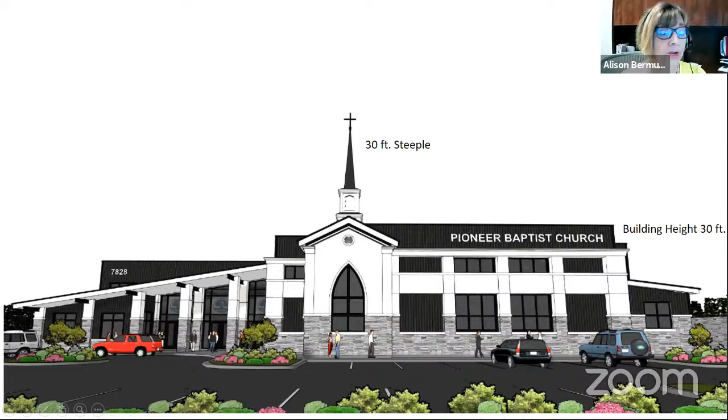The proposed church will be a stucco building with some metal siding, tinted windows, and stone - a very attractive church facing Auburn Boulevard. The building will be about 30 feet high, well within code allowance. A unique feature will be a large steeple, approximately 30 feet, giving quite a presence on Auburn Boulevard. Due to the distance back from the street, this larger building with the increased steeple will really help with that presence.

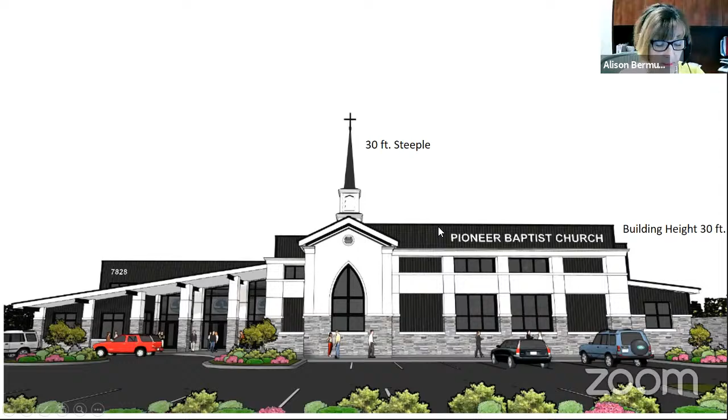The building includes a drive-up turnaround circle for people to be dropped off. The architecture extends along the front of the building around to this main drop-off area, as you can see here. There are additional windows to provide lots of light inside, some arched windows, along with the metal siding to give some accent features.

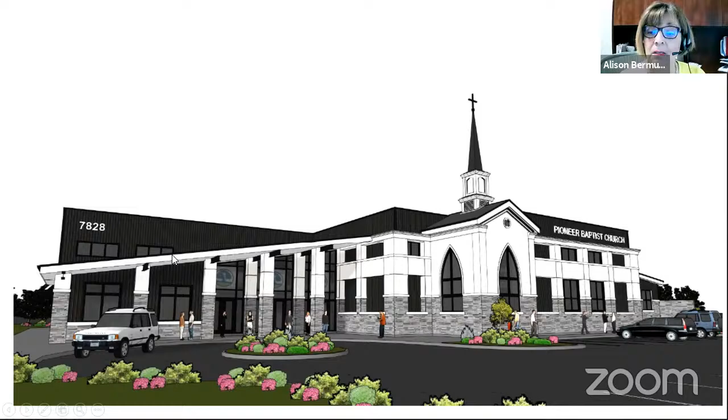The rear of the building again carries the same features with the stucco and metal siding, and these metal pop-out awning covers also provide some relief to the back of the building.

As I mentioned, this site is adjacent to a creek - this line here represents the creek. Access to the site is via the Boulevard. The southern driveway for the site will be a right-in. This yellow line represents the circle driveway for drop-off, so congregation coming north on Auburn Boulevard can make the right turn in, do their drop-offs, and then exit by turning right out onto Auburn Boulevard.

There are some parking spaces available on this site, but most people would travel up to the main parking lot to the north. If exiting this site, they could travel north and make the right turn into the parking lot to park, and then in exiting that parking lot, they can turn right and travel north.

If someone is coming from the north to the site, they can make this left turn into this parking lot. There are no left turns into the main church building. To access the parking, they would have to make this left turn here in front of this parking lot.

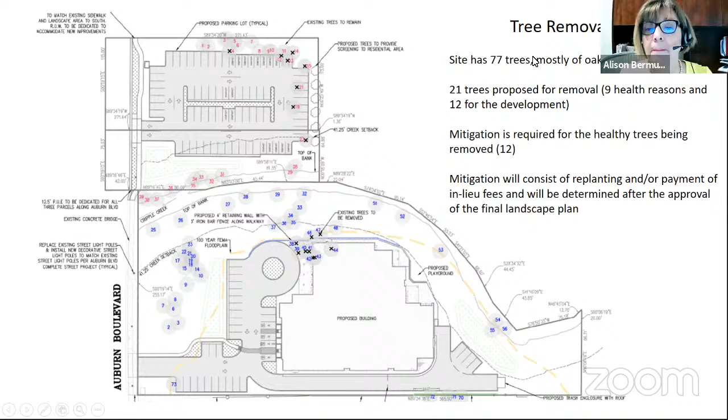As I mentioned, the site has had a lot of environmental constraints. For those reasons, they did have to have several studies prepared: a traffic study, a biological resource study, an aquatic resource delineation report, a cultural report, a noise study, and an arborist report. All those documents were prepared for compliance with CEQA, and based upon all the information found and the proposed layout, the project is found to have no significant environmental impacts.

In reviewing the project's consistency with the zoning code and the general plan, it is consistent. The site is located within the Auburn Boulevard specific plan area. That plan is broken down into zoning districts, and this site is within the Rusch Park zoning district. It has a general plan land use of general commercial. Looking at those 2 zoning documents, a church identified as a meeting facility is allowed with a use permit, which is one of the entitlements we're reviewing tonight.

The design guidelines applied to the project were contained within the Auburn Boulevard specific plan and the zoning code, and the elevations proposed for that church are consistent with both those design guidelines. The development standards of the zoning code and the specific plan for height, setback, floor area ratio, and the Creekside development standards we have were compared to the project, and it is in compliance with those as well.

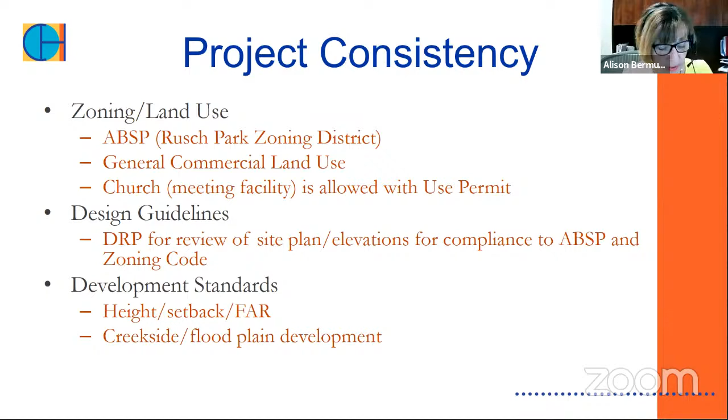And for consistency with the general plan, looking at the general plan policies, we have three that the project supported. Policy 7.2 that promotes new development to encourage a sense of belonging, which a church certainly does. Goal 23 of the plan that supports adequate locations and facilities for local and neighborhood gatherings, which the church and the gym certainly would do. And then Policy 47.1, which supports businesses, organizations, and programs for youth, and again the church and the proposed gym would do that as well.

Entitlements that are presented to you were the use permit for the operation of the church, the daycare, and other church-associated uses; the design review permit for the design presented for the church, including construction of the 2-story building with a 30-foot steeple, the site improvements for parking, landscape, and lighting; and then the tree removal permit for the removal of 21 trees, 12 of which are healthy. Based upon all that information, I have a list of motions that we can get to whenever you're ready.

Thank you very much, Alison. Very, very good report. Commissioners, do you have questions?

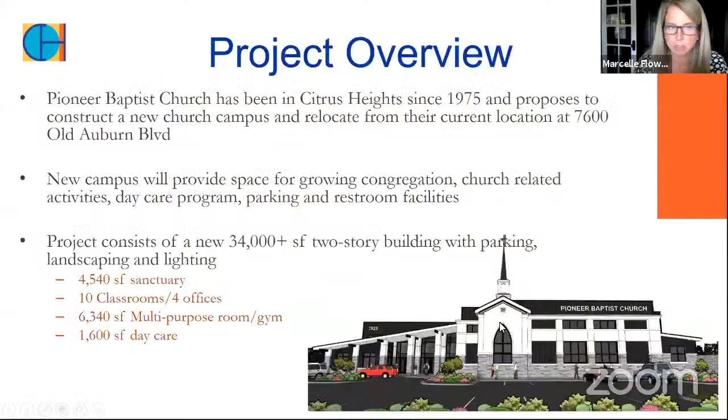Commissioner Flowers: Thank you, Alison. You illustrated some of the driving patterns going in and out of the building. The one I had a question about is if someone is coming from the north, attempting to turn into the first parking lot, the most southern parking lot, will they have to go down and make a U-turn at a signal to get into that location? You said there's no left turn from the outside lane there, so where will they make the turn to come back and turn into that first driveway?

Correct. So if they're coming from the north and want to turn into the main parking field area, they can turn left into there. For the church parking lot, they would have to go down to Antelope and make a U-turn, and Antelope does have a proper U-turn there. Okay, all right, thank you.

Commissioner Engel: Yeah, I just had a question on the 111 parking spaces. Is there any kind of... I don't know how many parking places the church currently has. It's obviously on a much smaller lot and everything. How are those spaces determined? And is there any kind of joint use agreement with the bowling alley in case of overflow?

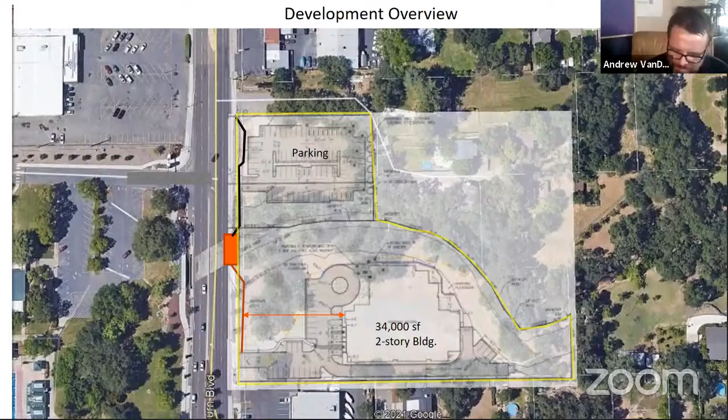I'm just curious. It seems like a 100-year flood is something we use to determine how much something is likely to flood, but it seems like we are having 100-year floods much more frequently than ever. Yes, actually the storm in '96 exceeded the 100-year flood. So it was well beyond the 100-year limits. But our FEMA regulations and whatnot have developments built to the standard of the 100-year flood.

I can look a little bit further into that to see if we've got any high water marks from that. And I would add, Commissioner Van Duker, that since the city's taken over stormwater maintenance in the last 5 or 6 years, the amount of flooding throughout the city has decreased dramatically due to better upkeep. But you're right, it doesn't preclude a superstorm from flooding it. The 100-year flood is what we design to. Okay, all right, that's all I had.

Any other commissioners have anything to question? I do have some. This is Mike Nishimura.

Can you hear me? We can hear you. Do you have two devices on, Mike? Because we're getting a big echo. Can you mute one of them, then we won't get the echo. Okay, can you hear me now? You're still a little bit echoey, but it's better.

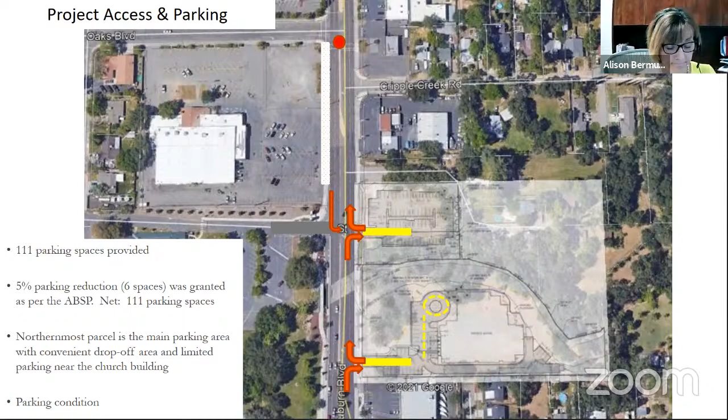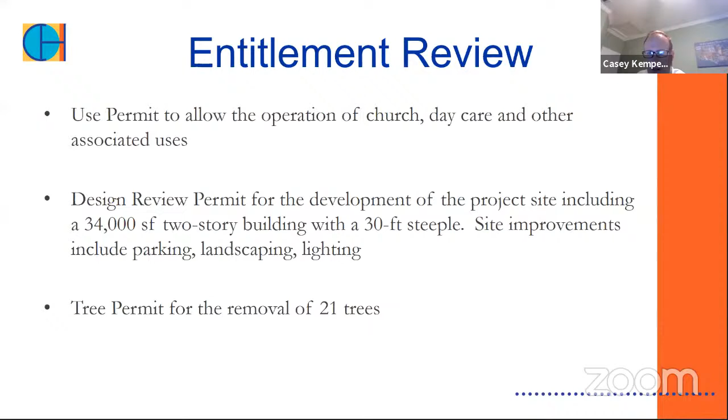The first comment we have was received about 6 o'clock this evening. It's from Julia Daikin. I am writing to voice my family's approval of the construction of a new facility for Pioneer Baptist Church. Our family of four has been attending Pioneer Baptist Church for the past 9 years and watched it grow and positively affect so many lives like it did ours. Just over a year ago, we were residents of Citrus Heights and still looking to possibly make our new home here. We still spend several days each month eating, shopping, playing, and very much enjoy what the city has to offer. More importantly, we see how much of a blessing this new facility would be both to the city and the church. Pioneer Church is a community of faith that serves so many and meets so many needs in our region.

And the second comment I have is from Albert and Ruth Fox. Please read the following into public comment. My name is Albert Fox. I am writing in support of Pioneer Baptist Church's application for construction of a new worship facility on their currently vacant property on Auburn Boulevard. The church, its staff, and members have been good neighbors at their current location on Old Auburn Boulevard. Their strong support of and commitment to our community is evidenced by their growth and the need for a new facility presented here tonight. The plans as currently proposed are a perfect fit for the property, and the effective use of space is to be applauded. The applicants have taken great strides to consider the concerns of the neighborhood and conform to the land use restrictions presented by this unique property. As a resident of Area 6, I look forward to the positive impacts this project can bring to our neighborhood and to the appearance of the Auburn Boulevard revitalization efforts. My wife, Ruth, and I urge the Planning Commission to approve this project application as presented.